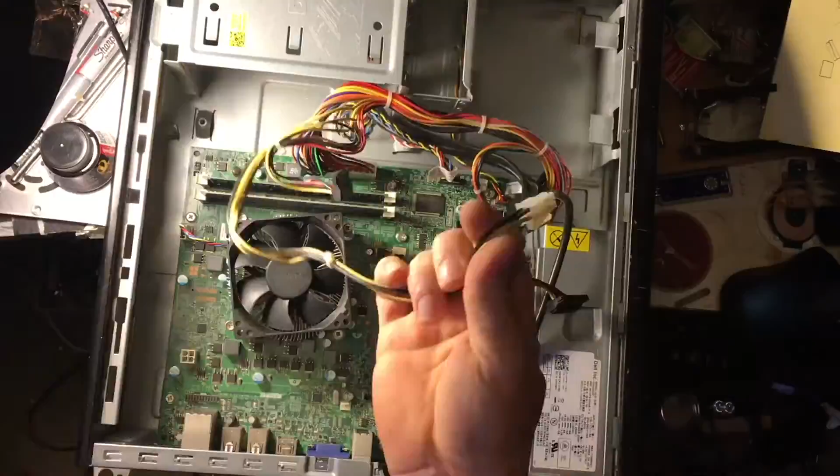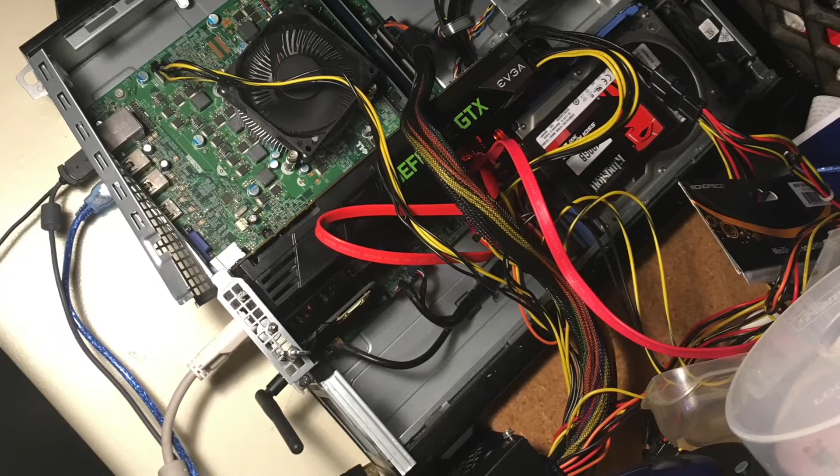During the time that all of my stuff was a mess, I only had what I call the wall computer to work with, which is essentially all the parts I have lying around smushed together in a machine. It can barely run CAD, and I can barely get Cura running on it. But I figured I could do something fairly simple and not waste a whole lot of time twiddling my thumbs. So this will be a good opportunity to talk about minimizing Bowden backlash.

I figured I would just try out some premium components, see how premium they actually were, and try some rather unorthodox stuff, or at least stuff that I hadn't seen before, just to see how well it actually did. Then I could just dump all that footage and worry about it later. Not a lot of computer horsepower required in that. But the whole thing kind of chose its own direction when halfway through I came to the realization that there's such a thing as counterfeit Capricorn tubing.

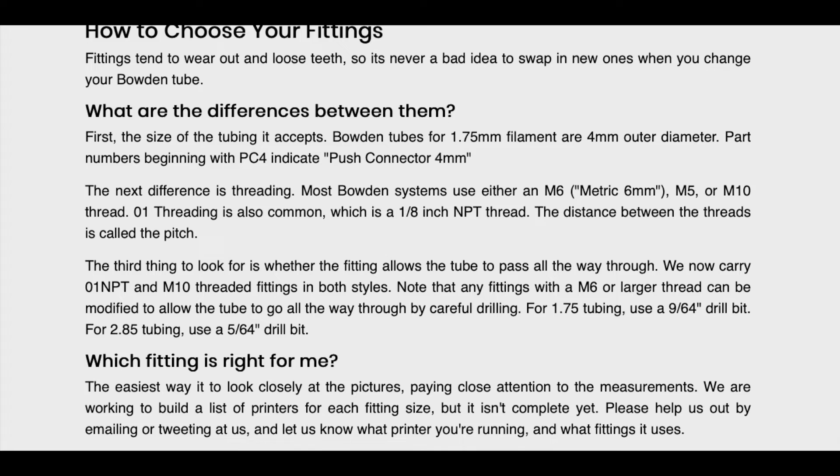I think, unless they changed the specifications over time and I just got some of the really old stuff with larger internal diameter and crappier Teflon and all that kind of stuff. If that's the case, somebody let me know in the comments. I didn't see anything on their page. And spoiler alert, this stuff was unusable, so I have a hard time believing that this ever would have been sold as premium tubing.

But regardless, I already had some genuine Capricorn tubing, but I only had 2 meters of it, and I knew that I was going to be destroying some with testing, and I wanted some spares. Traditionally, I don't or didn't use Capricorn tubing because of certain physical properties of the tubing itself. But long story short, I ordered Capricorn tubing by the foot from this place, a couple meters of it, and got some bad stuff. And I don't think they're aware, so I'll be letting them know soon.

But as a public service announcement, I thought I would put this out, and I'll show you how to spot the bad stuff and what it looks like when you print with the bad stuff. And I'll put that in context of the larger experiment where I actually do compare the slop in the Bowden couplings and the slop in the Bowden tubings, and do it as if it were legit and I didn't run into those problems anyway.

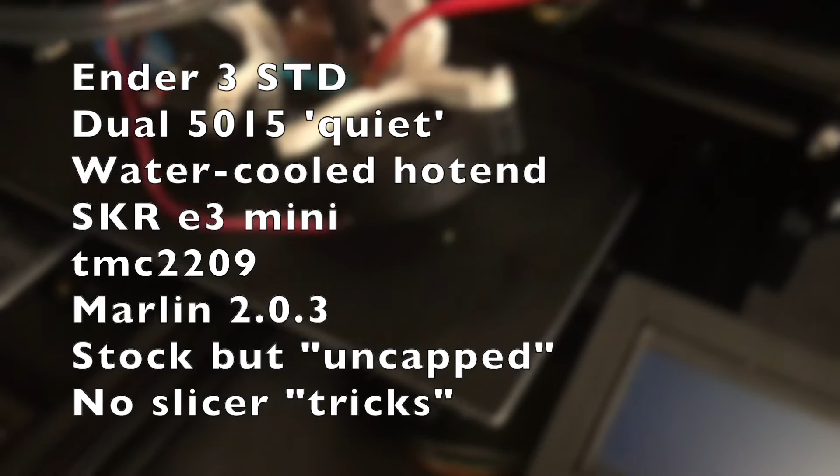Before anybody asks, this is the current setup for this printer. It's ever changing because I'm in the middle of a series, so this is just a snapshot in time of what's going on during this video. The firmware currently on it is Marlin 2.0.3. The settings are all stock but uncapped, so I am not artificially limiting the acceleration to 500 millimeters per second per second, that type of thing.

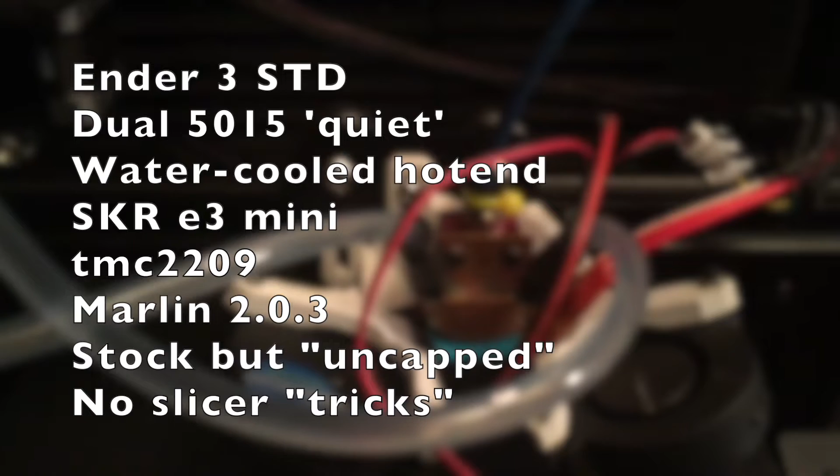So I can set those in a slicer as opposed to them being set on the EEPROM or the firmware. And there are no slicer tricks involved, as in when I went through, I used the stock Cura profile for this printer, but I turned off anything like additional wipe and combing and those types of things.

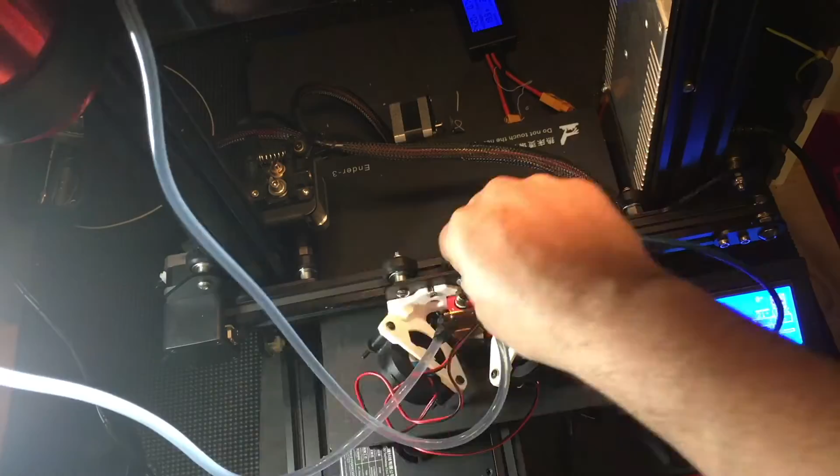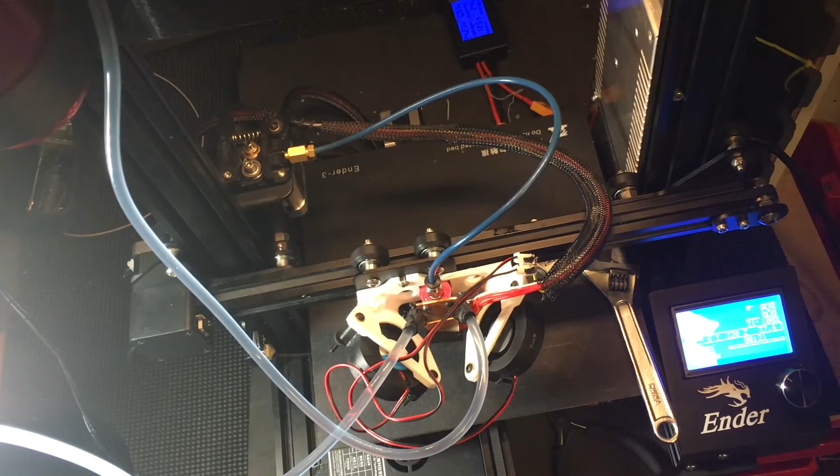If I may be so bold as to assume that everyone watching this video already knows what a Bowden versus direct drive system is, that'll save us a lot of time. And I'm not going to start a flame war between the two systems. They both have their pluses and minuses, but with the Bowden system, you're always going to have a little bit of extra travel. And I'm just going to refer to that additional bit of retraction as necessary as Bowden slop.

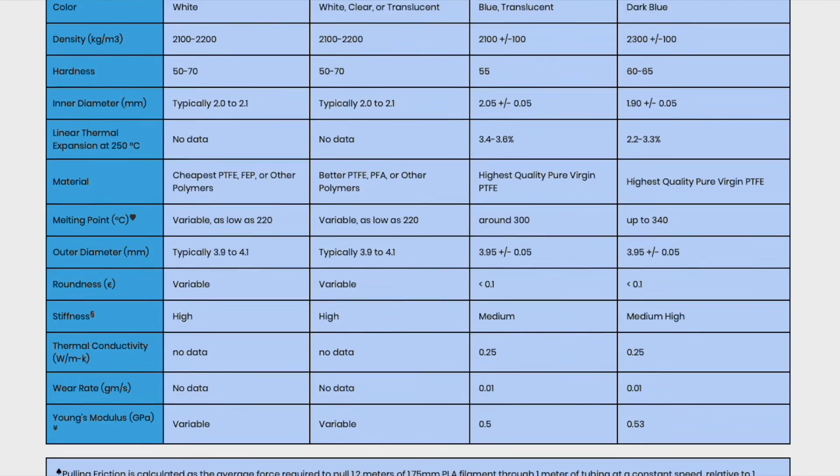The 3 main areas you have to look at are the couplings themselves, the clearance, which is the space between the inner diameter of the Bowden tube and the outer diameter of the filament itself as it runs through the Bowden tube, and then the physical properties of the material the Bowden tube is made out of, also with respect to the geometry of the cross-section of the Bowden tube, and its properties with respect to the properties of whatever it is you're printing. I know that's a lot of words, but it'll make sense in the future.

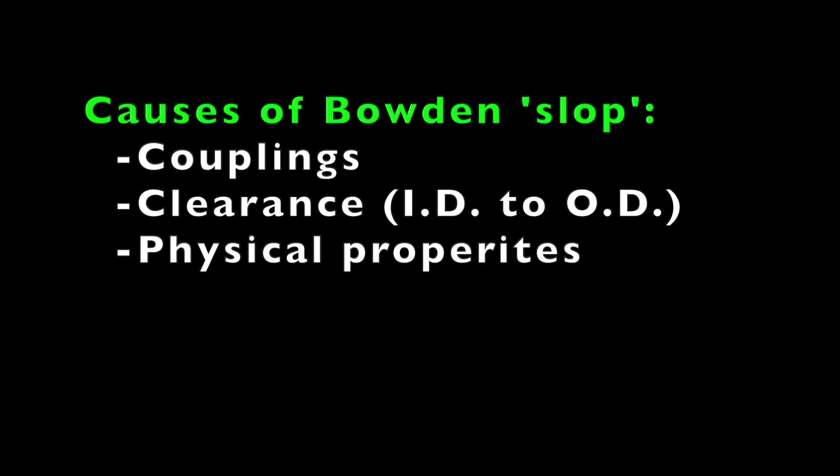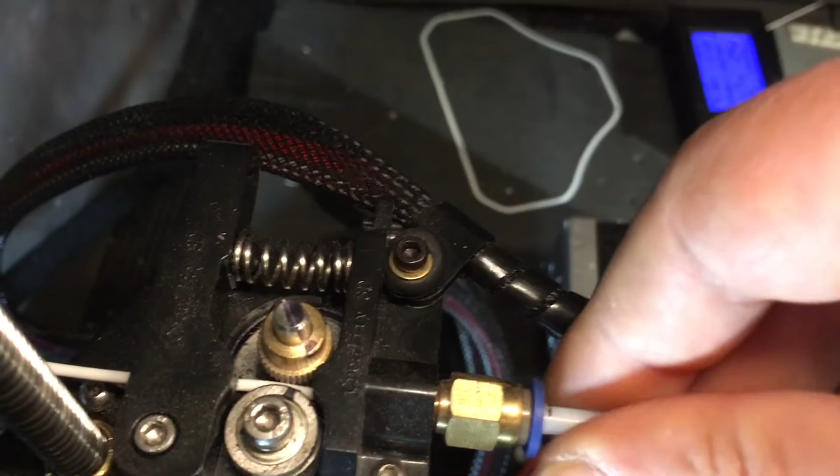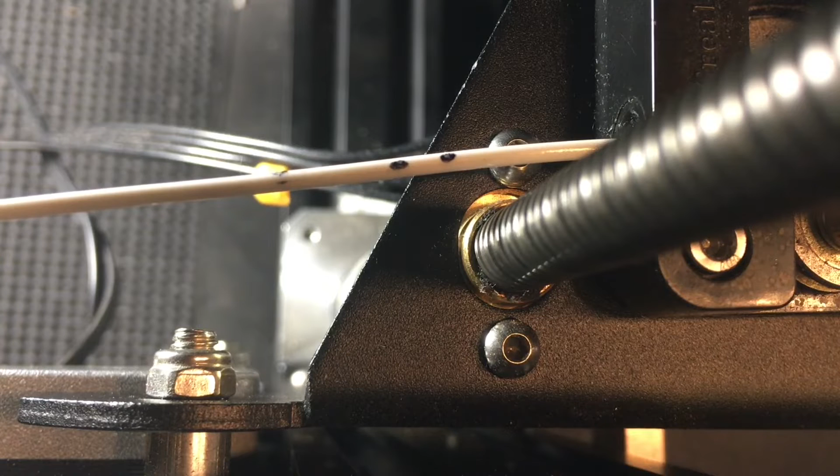The stock Cura profile for the Ender 3 assumes like 6.5 millimeters of retraction, while I was only using like 4.7, even with the stuff worn out, so if you're all the way up at that length, oy. But let's take a look at what these things are, and then if we break it down, that'll help us understand where the problems are coming in and maybe present a solution for us.

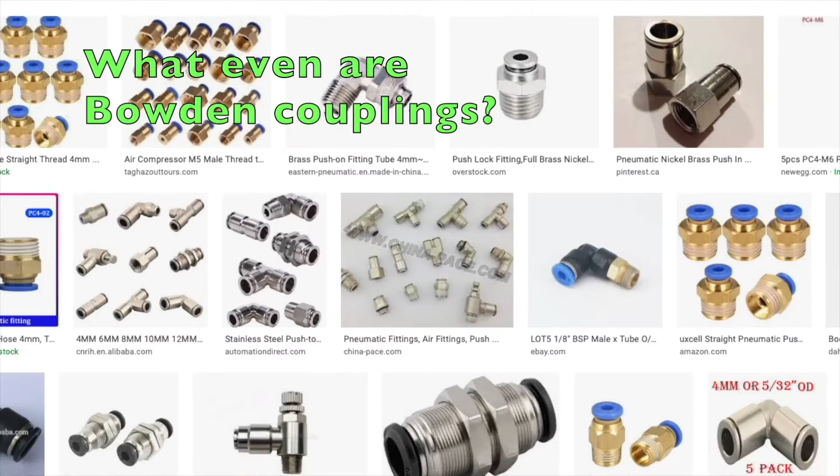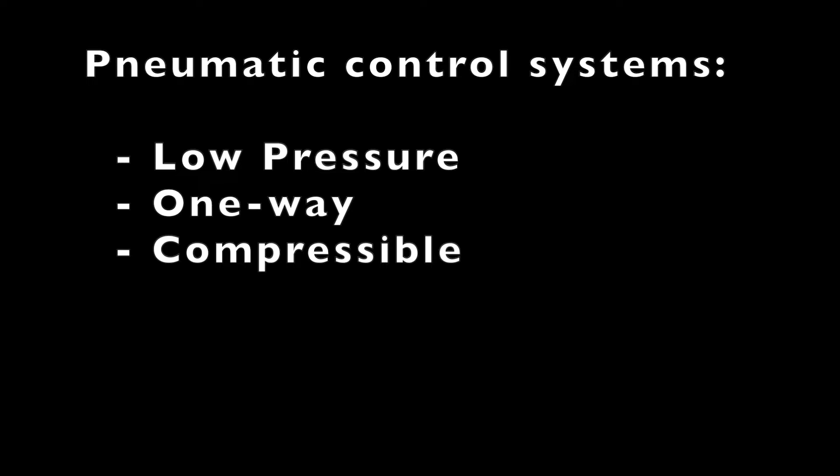As you may have guessed, these were just repurposed from another industry. These are 4mm push-in quick-release pneumatic couplings. Some key characteristics of pneumatic control systems are that they tend to be lower pressure, single-way, compressible medium systems, i.e. air. That's all important because it informs the characteristics of the couplings that we've borrowed for this purpose.

But the problem is, with any barbed system, it's really only good in one direction. You can have, like we do in these Bowden systems, a stop at the end where the end of our tubing butts against the one thing, and then we have the barbs on the other. The problem is we only have the mechanical properties of the Teflon tubing itself and the barbs that are sinking into them to keep that rigid.

So once that tubing starts to wear out at the contact point between the metal and the Teflon, you start to get slop. Or if you just have bad couplings that don't have sharp teeth, then you just have slop naturally. Now, you most certainly can get pretty decent couplers, and if you swap out your tubing and couplers all the time, you can keep it pretty good.

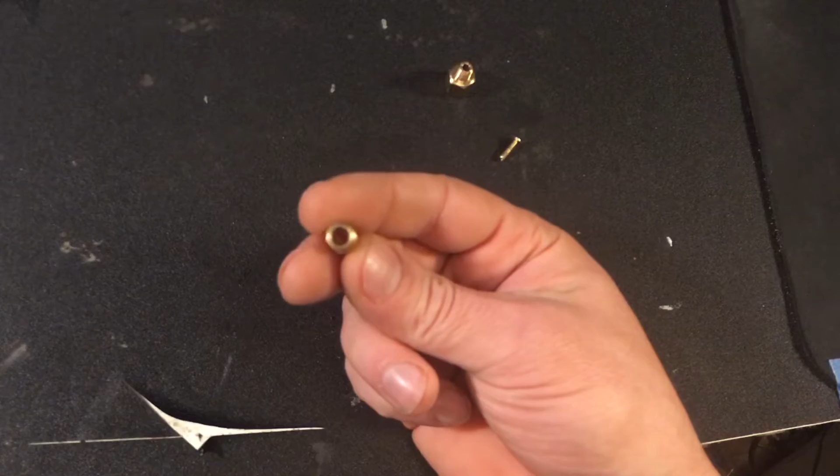It's 4 parts. You have the stationary collar, you have the compressive collar, and in the middle you have 2 things. One is typically called the olive, and that's this little compression bushing right here. And then this is typically called the barb, which goes inside your tubing. So in a perfect world, we could just slip the compression collar over top of our tubing and then slip the olive over top of that.

You stick the barb into the end of the tubing, and that's to give it something to compress against, to seal the hydraulic fluid in, and to keep the tubing from crushing. And then you put that into, well, your stationary collar at the end, then secure it to whatever it is you're trying to secure it to.

The problem is the type and dimensions of the tubing that we need to use for 3D printers is not what these are meant for. So we're going to have to shave down the diameter of the insides a little bit, and then when we stick this barb into the end of our Bowden, we're gonna have to shave down the outsides of the Bowden a little bit, because otherwise we're not gonna be able to slip our olive over top of that. Cool? Now, this was just really a proof of concept, so I'll rush through here.

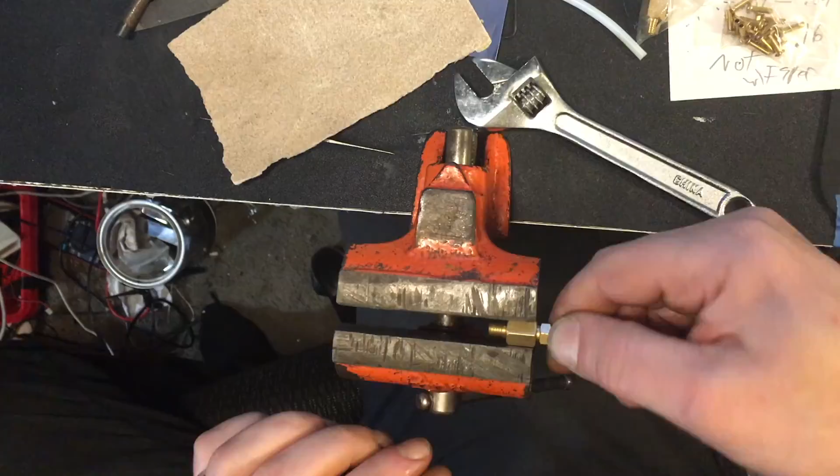Basically, what I did was clamp it into a little pony vise and then just use various size drill bits to ream out the parts that I needed to and clamp it together. If you want a how-to on this, I could do that as well. I just don't want to waste the time in this video doing it.

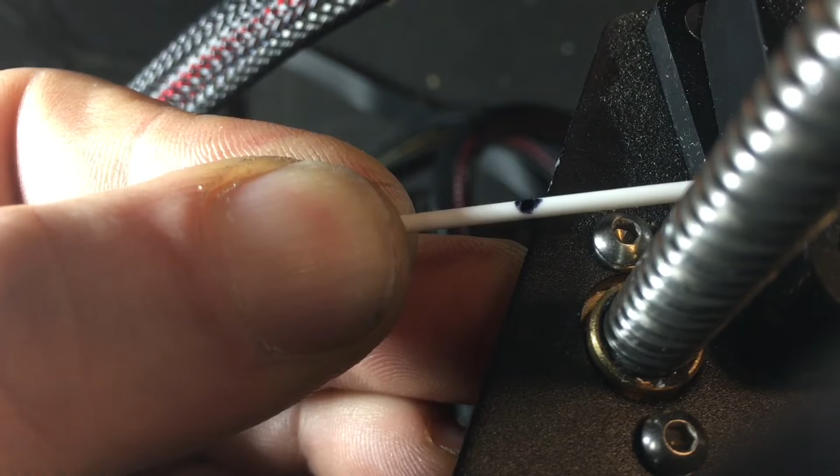So was it a pain in the butt? Yes. But did it do what I thought it would do? Yes. It brought the slop in the coupling down to 0. And that means I had a setup that I could accurately test premium replacement tubing against the stock tubing that we have been using.

Now, as I hinted at in the previous video, the goal that I more or less arbitrarily set for myself was about 2 millimeters of retraction. So I wanted to see how close I could get to that, or if I could surpass it with various modifications. Because this printer of mine, which will probably be decommissioned soon, runs at 1.5 millimeters retraction and has a Bowden system, obviously.

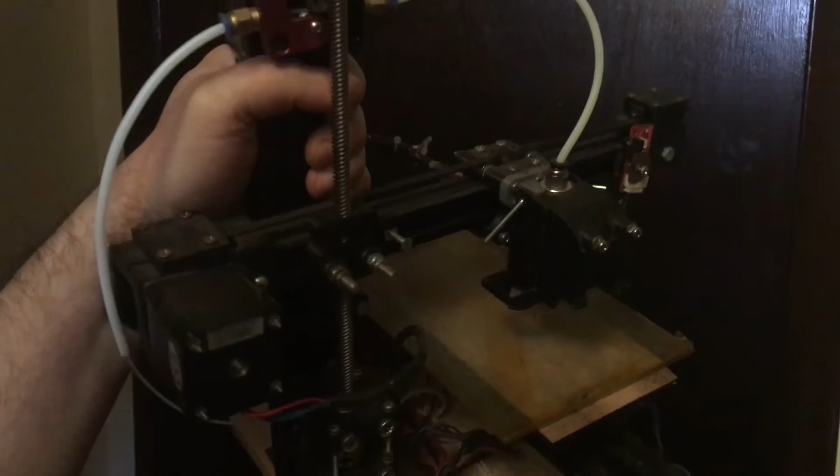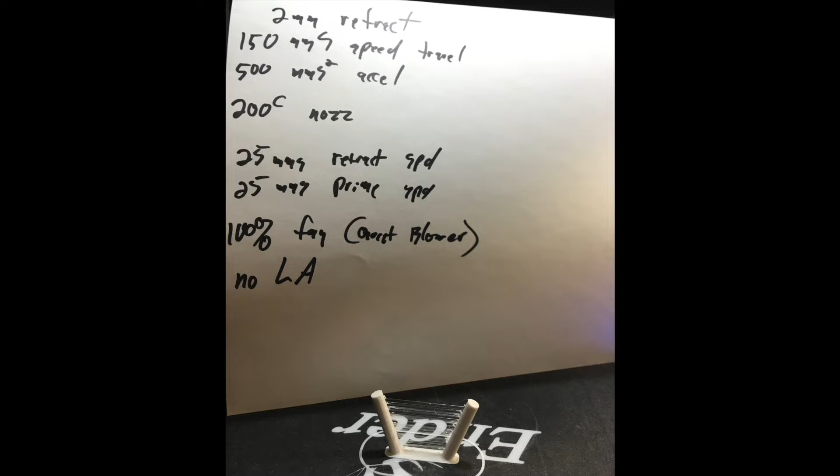So as far as our Ender, this is basically the stock settings plus 2 millimeters retraction and the stock Bowden setup with the little clippy John and the zip ties. So yeah, plenty of room for improvement. So, time to take premium tubing and add it to the hydraulic coupling and see what kind of a difference it makes. And it did make a big difference. Unfortunately, that was a bad big difference.

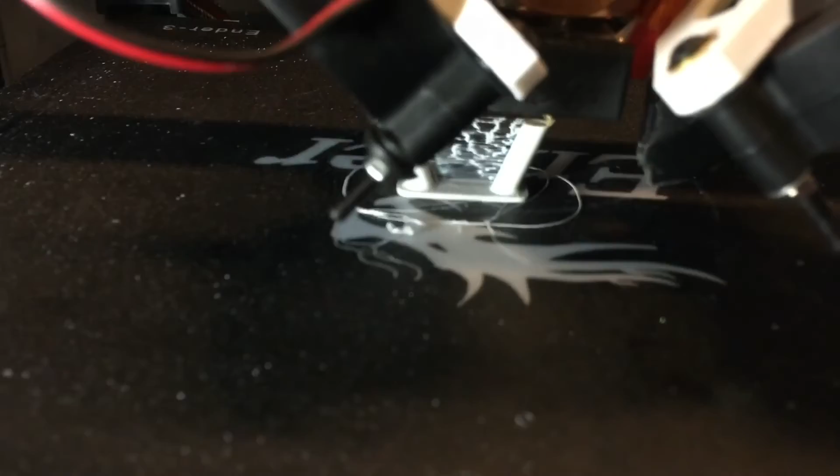Yeah, like I said before, freaking nightmare, and this is where this segment of the journey begins. The journey from Capricorn to Crapricorn. And that pissed me off because I already had some fake Capricorn, which was tubing that was supposed to have the same specifications as Capricorn, but was from AliExpress or whatever. So I thought maybe I mixed the two up.

But the thing is, I knew the fake Capricorn was black because I purposely ordered it black so I wouldn't mix it up, and it came in this envelope with this adorable certificate of authenticity. So I didn't mix them up, meaning it was this genuine, in quotes, Capricorn by the foot that was causing this problem. So let's look at what that problem is.

Now, my reaction, as is the reaction with most people that don't have narcissistic personality disorder, was, oh my god, what did I do wrong? So I did a couple more prints and checked in to see what was going on, see if there was movement in the couplings, because I had never tried this before.

I thought maybe I just screwed something up or misunderestimated something else. That's when I noticed this. Did you catch it? All right, here we go. We're going to have it again. There it is. Every time we went from a retraction to a print move, we would be stretching the Bowden tube out, and you could see that as it dove.

Now, full disclosure, that's the reason that I'd stayed away from premium Bowden tubing in the past, because of that extra stretch that it tended to have. But I had heard that Capricorn's newer formulation was stiffer, so I was going to give it a try. But this amount of stretch was kind of ridiculous.

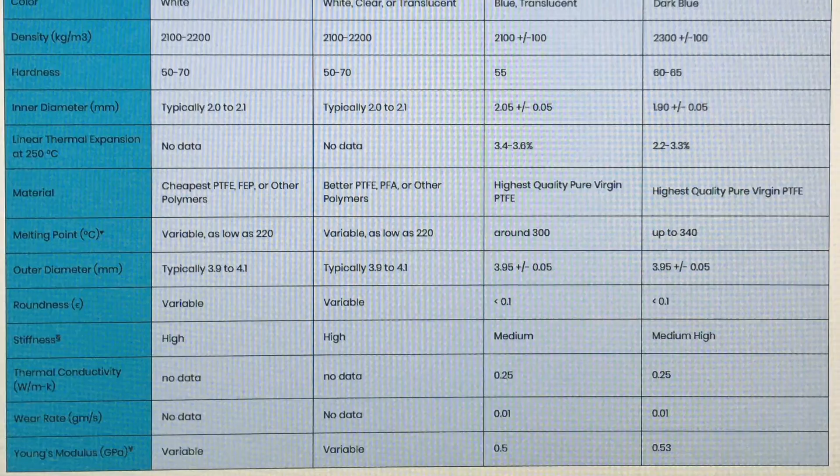And we know that because even though we don't have all the physical characteristics of all the tubing we're using, we have at least some of the characteristics of the Capricorn tubing on their website. So we can use that as the basis for a little bit of math and show what's going on here. And no video would be complete without an unnecessarily dangerous experiment to go along with it. So yeah, we're going to test those tubings as well. Those tubings? That tubings? Whatever.

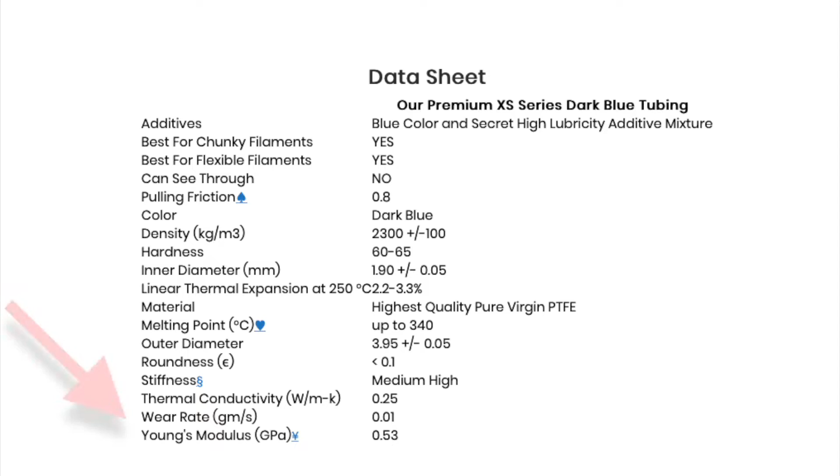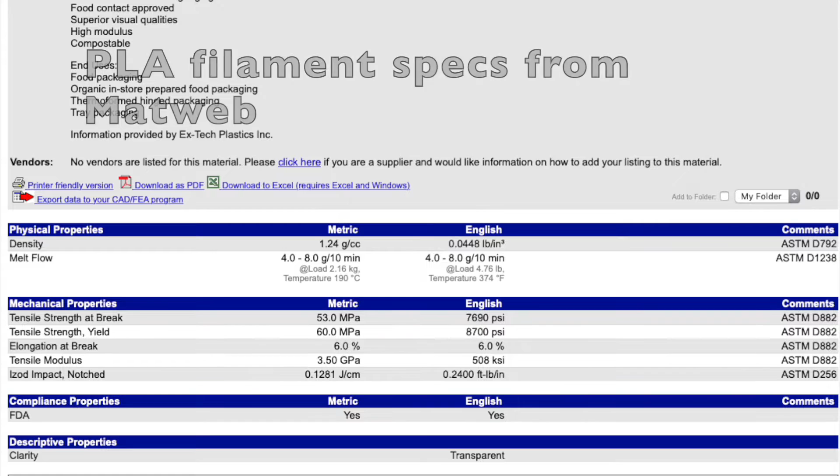Now, the specific property I'm interested in here is the Young's modulus, and for an exact definition, you can look it up on Wikipedia, but basically it's the ability of a particular object or substance to resist change in dimensions. Essentially, in layman's terms, how stiff it is. And they give a Young's modulus of 0.53 gigapascals for the particular formulation that they use. So we're printing PLA here, polylactic acid, which is among the least compressible filaments that you typically find on a desktop 3D printer. It has a Young's modulus around 3.5 or so, give or take.

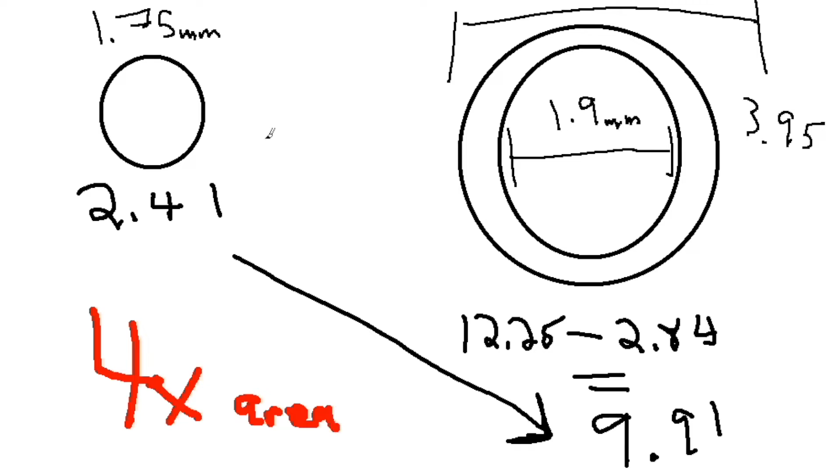But even at 4 times the cross-sectional area for our Bowden tube versus our filament, we're still talking about 3.5 gigapascals versus 0.53 gigapascals. So if these two are playing tug of war, the PLA is gonna win, but not by a whole lot. But simple fact is, with this stuff, we have a lot of weaving and bobbing going on. We have retractions and the advancing that we didn't have with even the cheapo tubing that came with it. So yeah, a go, no-go litmus test type thing is fine, but that's only any good once you have it on the machine.

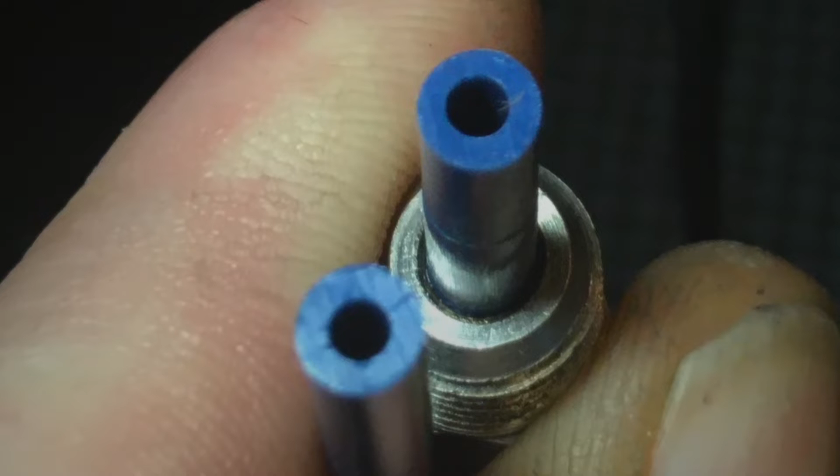Visually, just looking at these two, the fake stuff was ever so slightly darker than the real stuff that came out of the real package directly from the hands of Capricorn themselves. But moreover, I could see with my own meat eyes that not only was the hole in the middle not centered on the fake stuff, which is the stuff at the top that has a coupling attached to it, but it was also a larger diameter than the real stuff.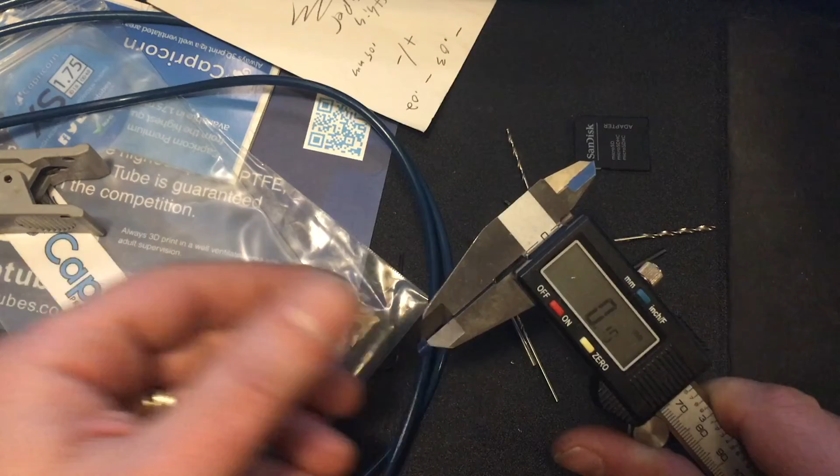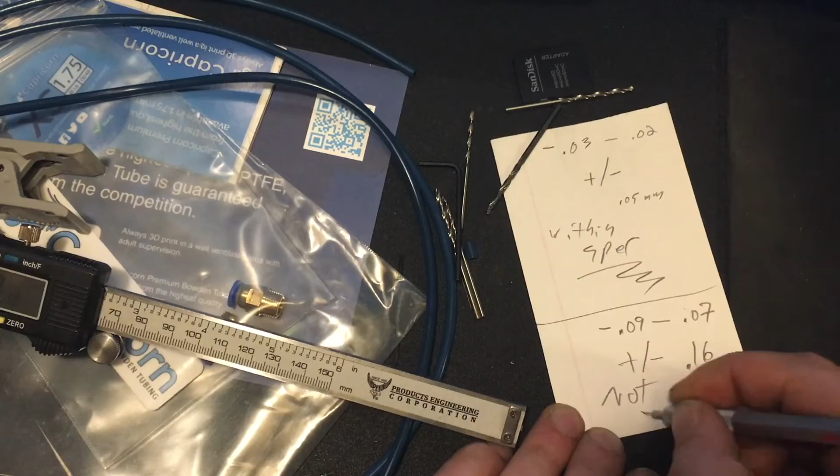So I thought, well, let's go ahead and take some exact measurements of these things and see if they fall within the specs that Capricorn says they're supposed to. And no, they did not. They didn't even make an attempt to match the physical measurement specifications. So that means they definitely didn't try to match the formulation specifications, the physical specifications of the actual material itself. So it's pretty easy to spot the stuff just by taking a pair of calipers to it.

So yeah, 15 minutes in, there's your public service announcement. If you're selling this stuff or using it and you got it in bulk, make sure you just go ahead and check that with a pair of calipers. Make sure it's legit. And speaking of legit, I pulled the legit stuff out of the package, made myself another harness with yet another hydraulic coupling, got that all shaved down and installed on the machine and tried again.

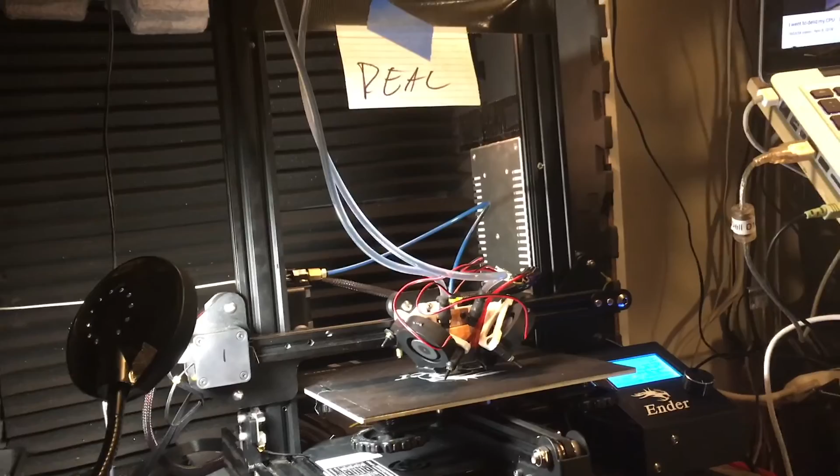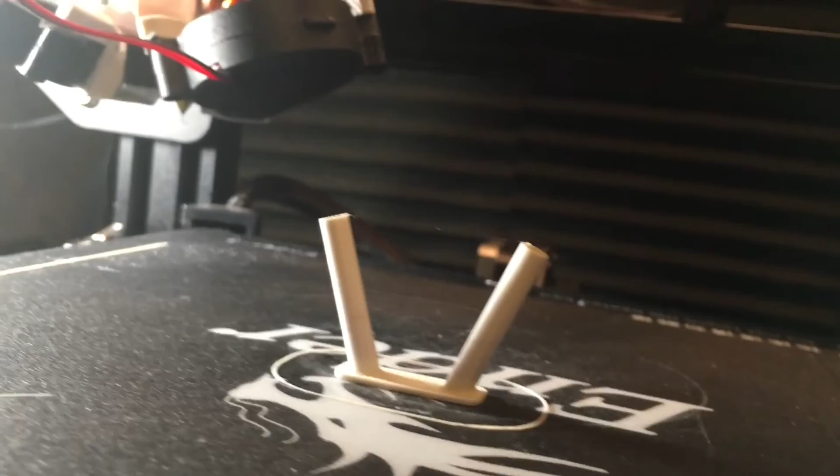I even hung a little tag above it saying real so I wouldn't screw these up. I printed out the same model with the same settings so I can get an A/B, and much to my delight, it was absolutely freaking perfect. Well, maybe not absolutely freaking perfect. It had 3 little wispies on it, as you can see right here. But compared to the hellscape that was the last one, yeah, pretty much perfect.

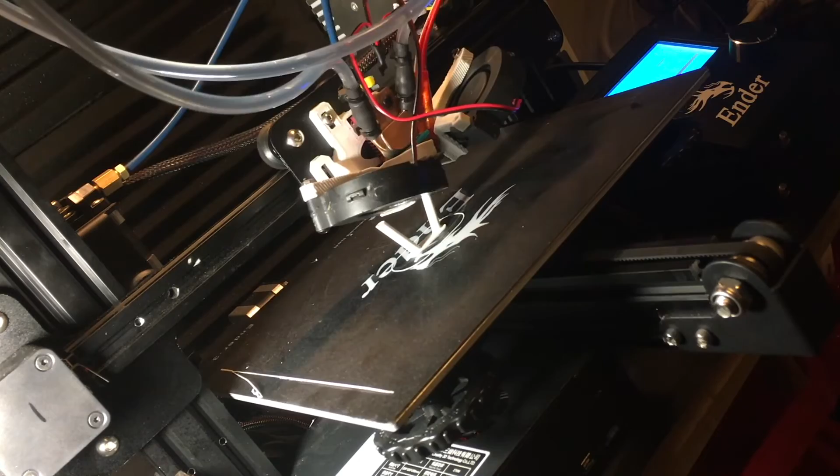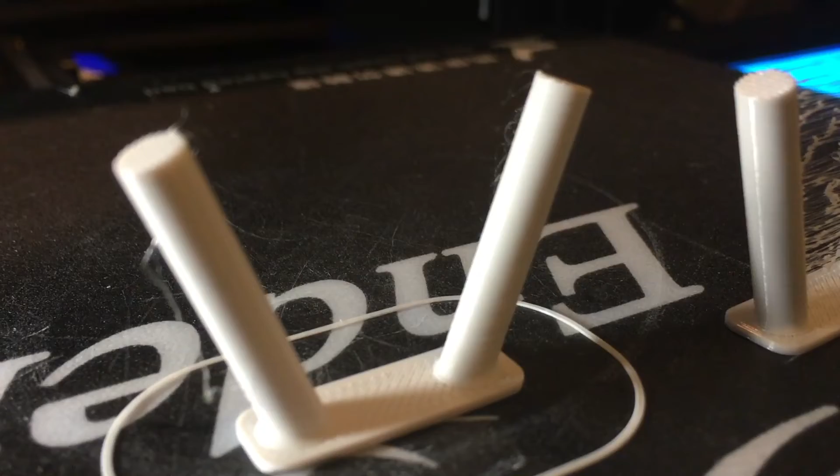The next experiment was just to take the same deal, 2mm retraction, and instead of using the quiet fans, use the turbo fans with the same shroud, just to see if I can get rid of those wispies. And it did. So here's a little before and after. This is the exact same setup, hydraulic coupling, all that stuff, but on the left right here, we have the Capricorn tubing, and on the right here, the fake Capricorn tubing. Real stuff, fake stuff.

Now, anecdotal evidence based on results is fine, but real world data is more useful. So let me go ahead and show you the experiment that I set up, and then I'll give you the data for all the different tubes. First off, there were 5 different types of tubing, and they were all cut to 350mm in length. Then I took these eye hooks, these are just number 4 eye hooks, and screwed those into each of the ends. It's a little tough to screw them in, but they go in pretty well, and they are super hard to pull out.

So after driving those all the way in, I hung one side from this guitar hanger that I already had on my wall, and on the other side I had just a regular old pull scale that went up to 50 pounds, but I only needed it up to 20 or 25 pounds or so. Before each of the tests, I took a 5-pound weight and dangled it from each Bowden tube for a couple minutes, just to make sure that everything was settled in and nothing was slipping or going weird.

I marked the end of it, then I pulled it down to 20 pounds, let it go, and then marked a space right up here at 10, which was my 0, and then yanked it slowly down to 20 pounds to see how far that mark would deflect. After running each test 3 times, here's an average of all 3 tests. So the real Capricorn XS stuff was actually the best, which I was delighted to see because that hasn't always been the case as far as stretch was concerned.

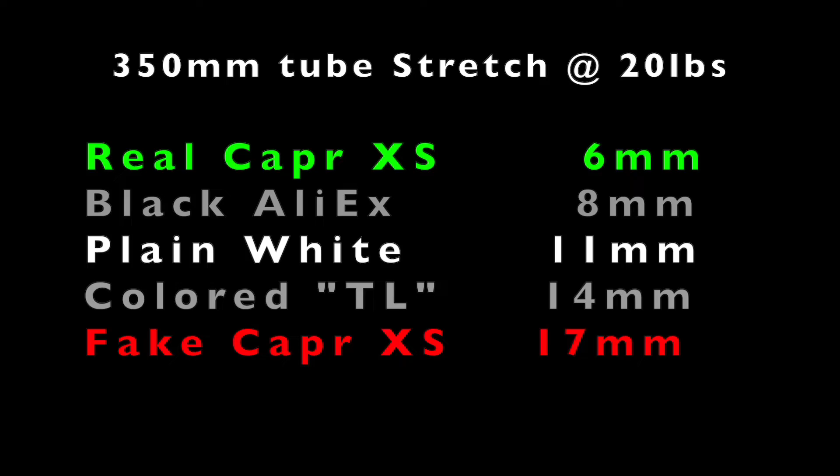This is the colored TL stuff. It wasn't posing as Capricorn, it was just posing as high quality blue Bowden tubing on AliExpress. This stuff is just the regular old 4mm outer diameter, 2mm inner diameter pneumatic tubing that you can get freaking anywhere. This is the black stuff that I mentioned; it has the same specifications and tolerances as the XS Capricorn tubing, and it was actually pretty nice. I'll show you how this prints in a little bit. And then I had this stuff, which was the counterfeit crap that ruined my day.

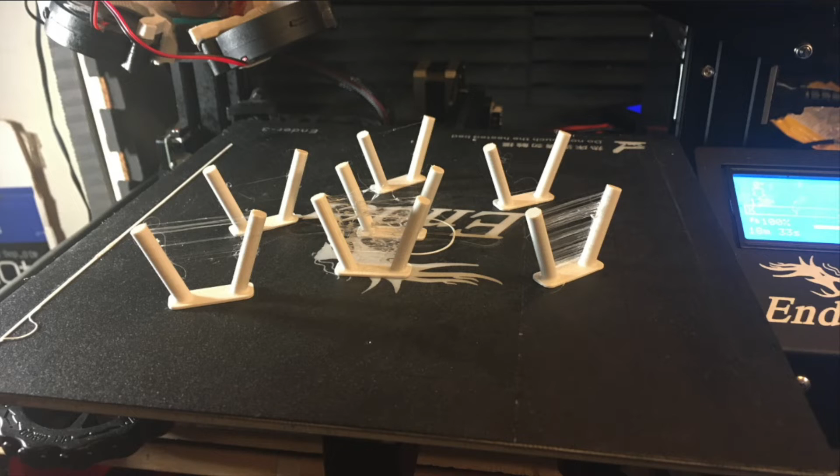So this next section is after I got the settings dialed in, I swapped amongst each of these different types of tubes and then showed you what the results were. This is not by any means all of the different test prints that I did, but it should give you enough of an idea that you can get the correlation between the amount of stretch in the tubing as well as the manufacturing tolerance and the size of the inner diameter of the Bowden. But this section also is demonstrational, not informational, so also skippable.

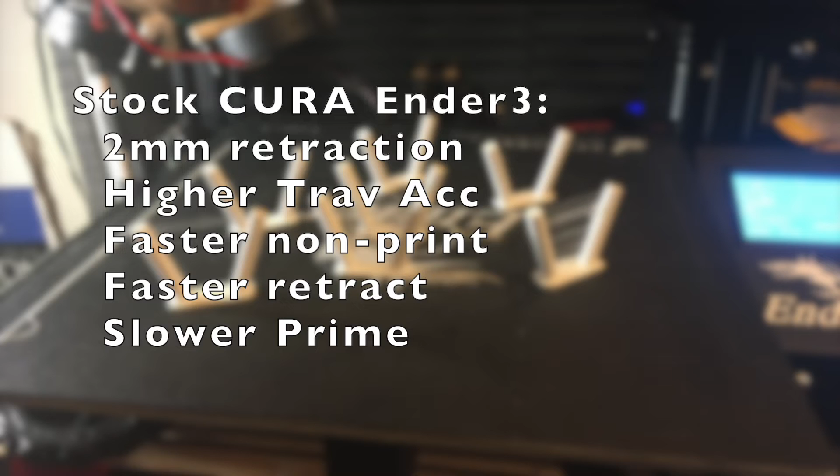So for all these tests, here are the specs, same as at the beginning, except for the turbo fans instead of the quiet fans. And we just used the stock Cura Ender 3 profile with, like I said, the tricks turned off, but with only 2mm of retraction, higher travel acceleration, faster non-print moves, and then a faster retraction speed and a slower retraction prime. And I'll talk about that a little bit in the nerdy section at the end.

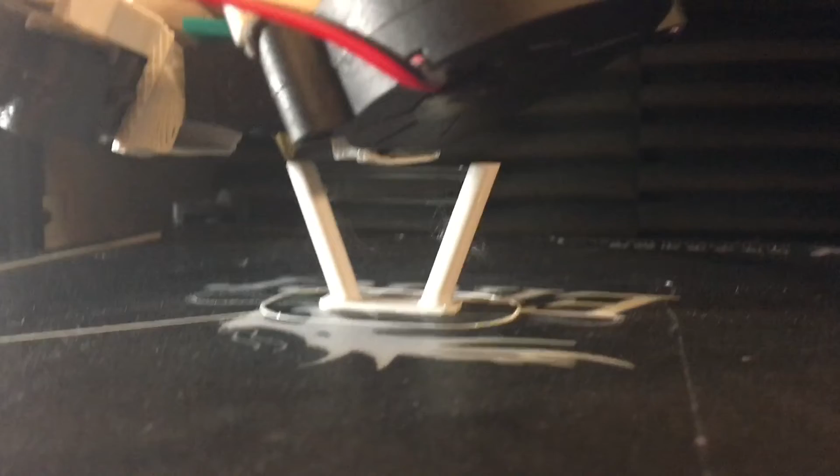Just so you don't forget what we're up against, this was the bog standard setup that I had been printing with since the day I put this thing together, but with 2mm of retraction. For comparison, this was the best setup right here. This was the genuine XS tubing with the hydraulic coupling. For comparison, here's the tightest of the Bowden clips. This was the one that came with the Ender with the clippy jaw, and this is brand new, so it's nice and sharp. Brand new XS tubing, and this is comparison to the exact same tubing, but with the hydraulic coupling.

Now here, let me show you the plain old white tubing, and this is brand new plain old white tubing, by the way. And notice here that when we have retraction moves, we don't have any stretching of the Bowden tube like we did with that fake Capricorn tubing. But regardless, the results were still pretty piss poor, relative to the premium tubing, probably just because of the larger internal diameter, but probably also because it was a little bit more flexible.

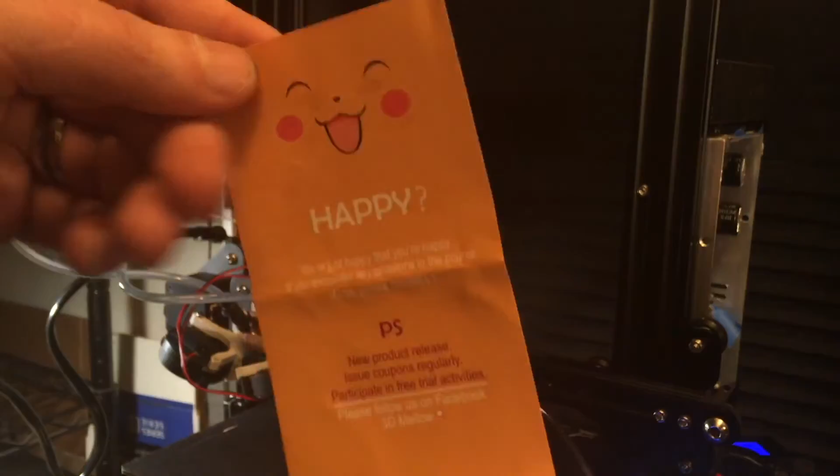But a pleasant surprise I got was this black tubing off of AliExpress with a little happy mail-in card here, or whatever this is. This stuff actually had very little compression on the advance and retract. It printed out really nice. You can see it has a couple of little genuine stringing plus the wisping. See, there's a little nubbin on the side there. But yeah, I was pleasantly surprised.

And then this rando spool of AliExpress fake TL grade tubing, just the regular 4mm outer diameter, 2mm inner diameter, actually printed out pretty nice. I think it's a little bit stiffer than the standard PTFE, and maybe it has slightly tighter tolerances. I'm not sure, but it did print out a little bit better than the plain old white stuff.

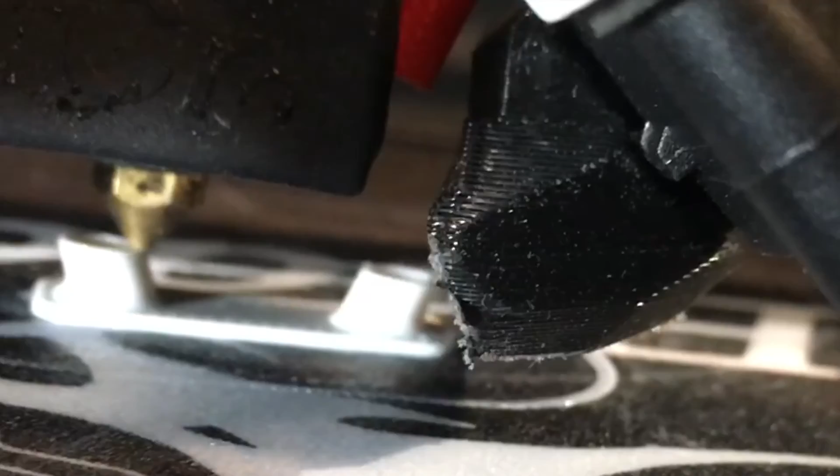And I can't find this complete after picture of just the standard cheapy Bowden tubing with the hydraulic coupling on it. I do have this video of it printing. If you're really morbidly curious about it, I could rerun that test and post the results somewhere, but it was just kind of in between where you would expect it to be. So yeah, I actually shot a whole bunch of footage of these different tests.

I didn't make a matrix and do every possible combination of tubing and ends because, quite frankly, I just didn't have enough hydraulic ends.

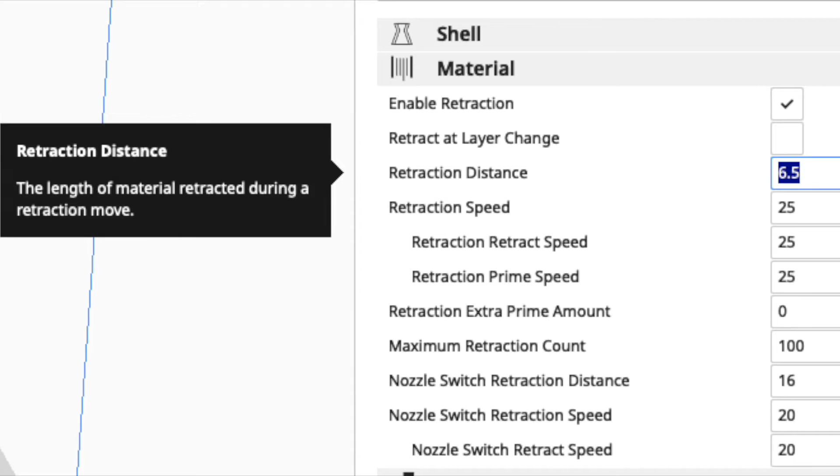So let's look at the system of the filament and the Bowden tube. Treat both of those two things as one system when we are advancing and when we are retracting. So the reason I went through all of this math earlier was to show that one of these two members, we will call these two different parts in a system members. So we have a tension member and a compression member, and they trade off with each other.

So one of these two members' mechanical properties, as in the properties of the material itself, is going to be dominating the system. And even with the higher cross-sectional area of the Bowden tube with respect to the diameter of the filament, its tensile modulus is so much lower that the PLA is still going to dominate the system.

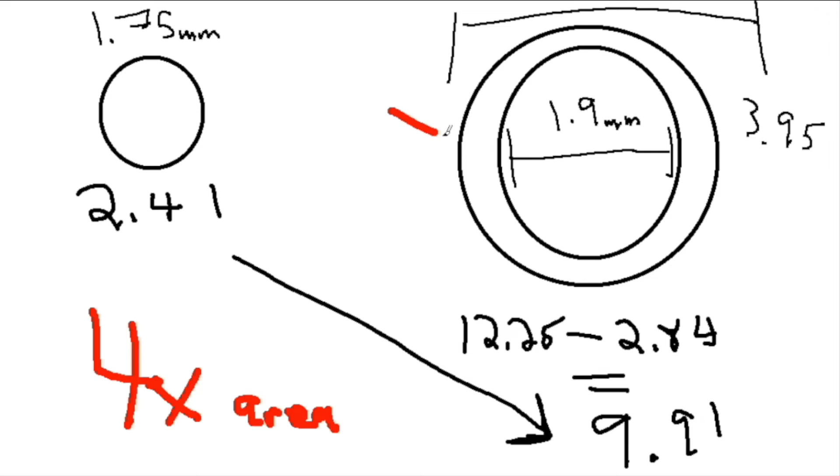Now, of course, your filament and your Bowden tubing material is going to fall within a range, and that's going to vary. But assuming that the 0.53 was correct, and if my math was correct, for a 1.75 millimeter diameter filament, that would require a tensile modulus of 2 gigapascals before you would trade hands from the filament being the dominant member to the Bowden tubing being the dominant member, which consequently is right around the tensile modulus of ABS plastic.

So let's talk about the two elements in our system. We have the Bowden tubing, and then we have our filament that runs through it. One of these is going to be the compression member, and one of these is going to be held in tension. Now, it's difficult to visualize that, so let's picture them as two separate members apart from each other.

What happens when you feed in filament? Well, you are putting compression on that filament as it tries to squirt it through the nozzle, which means since you have a stop at both ends of the Bowden tubing, you are stretching or tensioning that Bowden tubing. So if this is a bow and arrow, the bow is the filament and the string is actually the tubing.

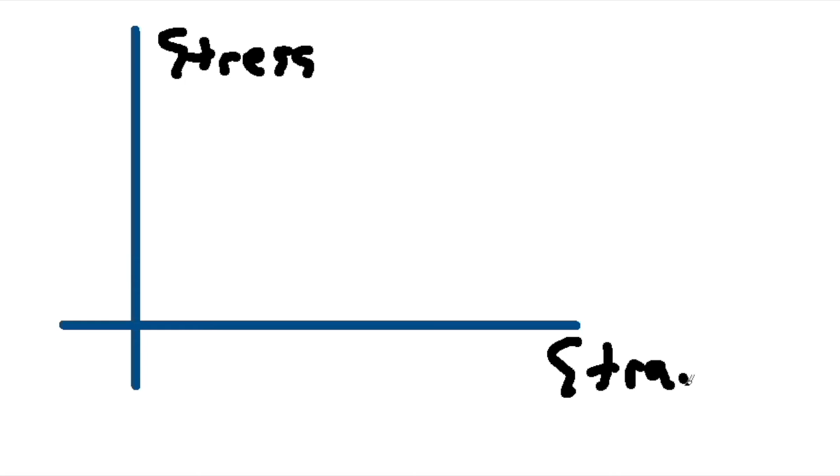Now, get used to hearing these two terms if you've never heard them before. Stress and strain. That's what's going to be used to define all of our different physical parameters of properties, and you're going to hear me use it a million times if you sub to this channel. Stress is the pressure and strain is the distance.

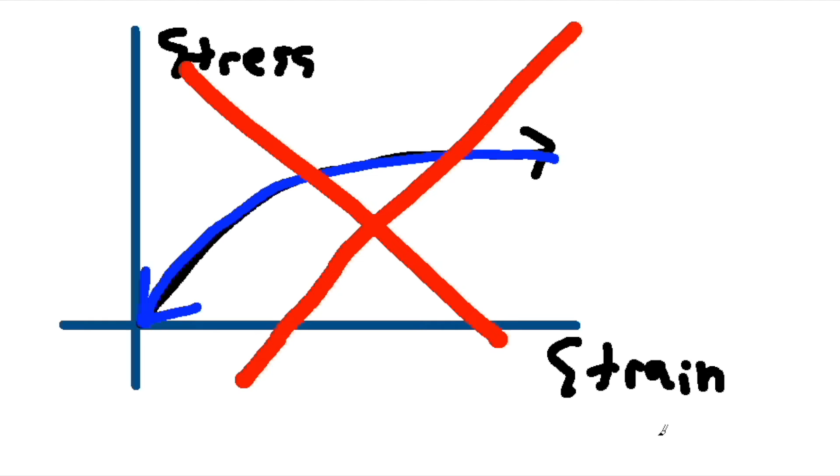So let's make an imaginary curve as we're putting stress on something. So we'll say this is stretching our Bowden tube out. What happens when you release that? Well, in an ideal world, it would just follow the exact same path at the exact same rate of speed backwards. But that's not the fantasy world that we live in at all. Very rarely do you get something that follows the exact same speed and path back.

Usually what happens is you have a little bit of lag, and that lag is a memory effect that we call hysteresis. Basically, that means whenever you relieve pressure on your printer, you are not relieving pressure at the rate that you say you are in your slicer, because we have a system lag. We have a memory effect in our Bowden tubing that's being stretched to tension by our filament, and that's going to dominate the behavior of the system, at least in as much as we are waiting for it to catch up. And I'm going to show you how slow that is exactly.

So I set up this system here with the Capricorn XS tubing, put it under tension just like everything else, but constrained this a little bit so that it could only move up and down. And what I have right here is a 5-pound weight hung off it, and then I'm just going to pull it down and release it and let it spring back.

And then we will watch how long it takes to spring back into the exact same position that it was. However, whatever that is lagged behind whatever you would expect it to be, well, that's our hysteresis, that's our memory effect, that's the lag in the system. See that? It's like a rubber band. It doesn't bounce back like a spring. It happens very gradually. Release, and then it happens over a matter of a few seconds.

So first I'll show you this in slow motion, then I'll show it to you in full speed, and I'll put a flash before it and after it so you can even time it yourself if you want. But what I'm doing is pulling back this filament 5 millimeters and then releasing it and seeing how long it takes to go back to its original shape. Release. And this is 25% speed. So you can see how quickly it goes through the first part of the travel, and then it takes forever to slurp back to shape. Here's real speed.

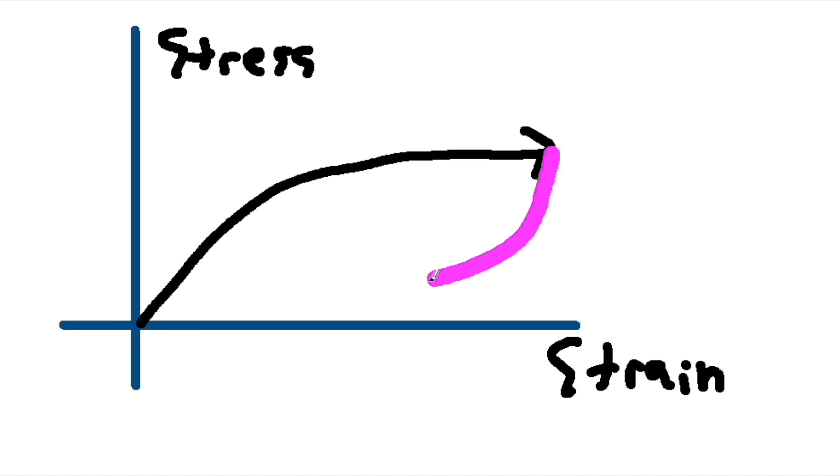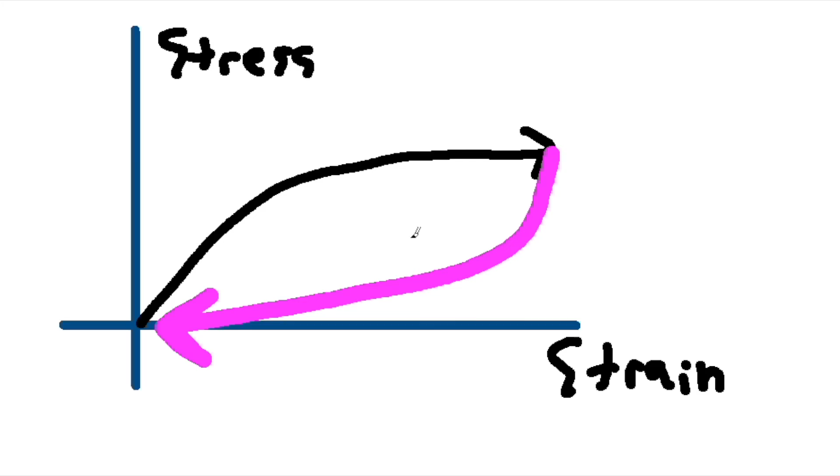Well, it tells us that whatever it is we put into our slicer, as far as our retraction and our prime settings, they're going to be dominated by the tubing if you have a whole lot of flex in your Bowden tube. And visually, we know what the end result of that is. So this is not only because we need extra distance due to the stretch of the tube when it's being tensioned by the filament being driven into the hot end, but also on the moves in the opposite direction, we are not only pulling the filament away from the hot end, but then we are waiting for the Bowden tube to then catch up and retension the system and reach a stasis.

Now, let me give you 5 seconds of this and I'll explain what's going on here. That was a print that I showed way early back in the beginning of this channel, a few years ago on this experimental high-speed miniature Bowden machine. You can go back and watch the whole dumb print if you're a very boring person. It was really just there as evidence for the haters.

But the point of that whole exercise was to try to find out, when we're pushing the envelopes of speed and acceleration, that type of thing, what requires a kind of rethinking, or what is it that we overlook that we should be looking at, just so that we incorporate that into our paradigm and then, well, hopefully get better, faster prints or better settings or whatever.

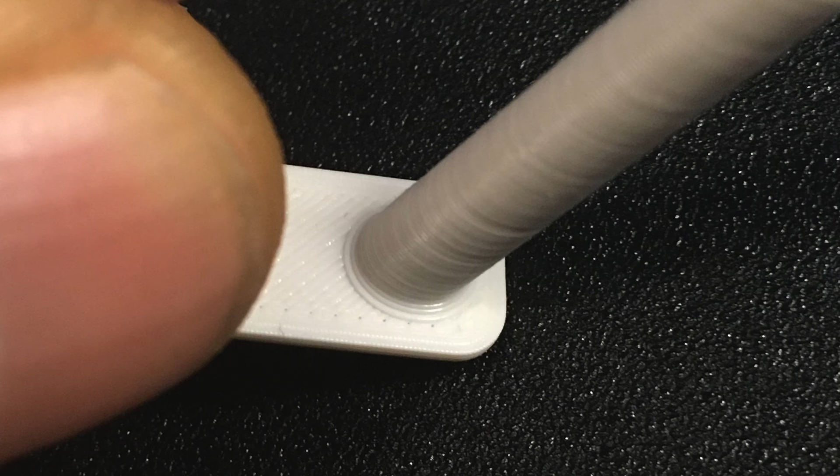But what I did learn with the high speed stuff, especially with smaller or more intricate objects, is that you want your Bowden tube to have the least amount of flex as possible. A, to avoid having to do all that retraction, but B, because that memory effect means you're going to be into a printing move by the time that your Bowden tube stabilizes, and you're going to get areas with under and over extrusion.

And one last area that I would love to cover in this video, but I'm not, because it's going way too long, is that printing fast, and hard retractions and prime moves when you get into super high speed stuff makes you start to really respect the non-Newtonian nature of molten thermoplastic. Despite the fact that we're relieving pressure on the nozzle during retraction moves, really what we're doing with advanced moves and printing moves is that there's shear thinning going on, depending on the thermoplastic, the temperature, the pressure and the velocity we're applying that pressure. We do have shear thinning and then shear thickening when we do a retraction move that prevents the filament from oozing out. But I said too much, so I'm finished with this video now.